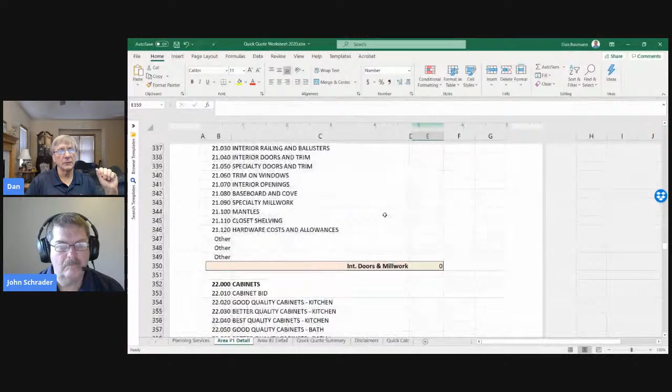And then you're going to have a window package. So the window package, you've done enough of these, it's going to be $8,000. You just work your way through this process of all these different categories and the elements in the categories, and you finally get to the bottom, and you're going to come up with a high-low number. Notice I said high-low, not low-high.

Let me get to the bottom here. Actually, I got to go to the summary. So I have it worked out right here. Here's where I plugged in those numbers, so I had these different categories. This is what I used to use when I did contracting, and we've got a high and a low number. I would just adjust that high-low number right here and put a little number there, and this worked pretty well for me.

I would show this to the client and say, yeah, your job's going to be 18,000 to 16,200, or 180,000 to 160,000, whatever the numbers end up being, because I've only plugged in a couple numbers here. So the idea was that I would do medium, low, high. That's right, when I would only do two categories, I would go high, low.

The idea is that the customer will remember the first number you tell them. So if you tell them it's 16,000 versus 19,800, guess what's going to happen the next time you have a conversation with them? They're going to say, yeah, you remember you told me it was 16,000 - versus if you say 19,800, it's really silly too, and it works.

Have you ever done this, John? Where you've given them the high price first? Yeah. Not since I've learned about this. I haven't really tried that. No. Okay, try it sometime.

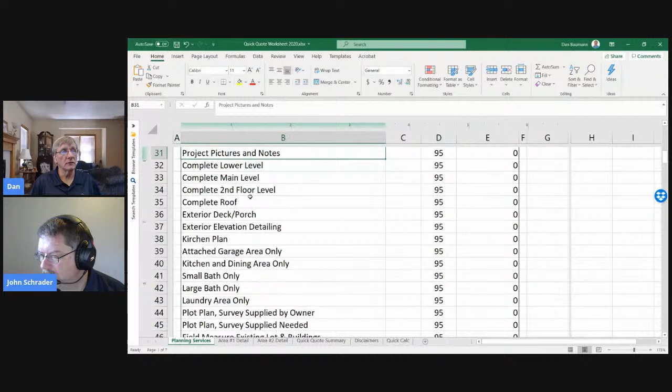So when you think about the time you spend doing an as-built, that's kind of like discovery. And when you do a new home, you've got to discover what's the lot, what's the setbacks, which way you're going to face it. There's a lot of work that goes into deciding where that building's going to go on that lot. When you get into an as-built, someone's going to have to go measure the lower level, second level roof. So I just kind of threw all these different things on here, you're going to do the landscaping. You're going to add for high detail, electrical, HVAC, mechanical.

I think Al Fry was just on a call on a webinar with Scott, where he talked about he charges more for that. What just happened to my screen here?

Changed. Color. There we go.

You can break that down as to how much detail you're going to put in your as-built—it's going to be a quick walkthrough measure, or you're going to put real detailed time into it. I know contractors that will do a quick as-built, get some rough numbers, do a good plan, but they know it's not perfect yet. They get their estimates done, get the proposal done, get the project sold, knowing they're pretty close, but they don't go into construction until they go back and remeasure the job and redo the plan, or at least fix the plan they've got. They verify everything.

So there's lots of different ways to do it. I've always been of the mindset: you go out and get accurate dimensions right away, be done with it, then everything you do from that point forward is solid. Someone's got to pay for that as-built.

Then we roll into the conceptual plan and ideas—you've got to come up with the ideas. John, how many times have you done a plan where you've done 10 different versions of the same plan, showing a little different variations? Most of the time when I do that many versions, it's because I'm not charging the client enough to start with. You know what I mean? What do you mean? No.

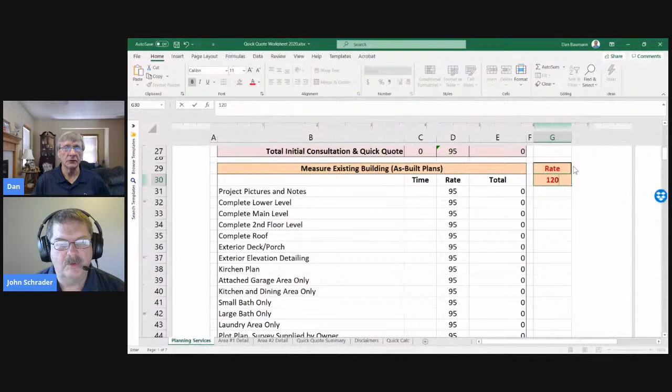To answer Jay's question from my perspective, I noticed you had a lower per hour rate for conceptual up at the top. Yeah, that should probably be higher actually. Think about it. Part of my thinking would be you're doing conceptual stuff, you might just be shooting the breeze a little, getting to know them. Maybe you don't want to charge them the full 120 for that.

I know sometimes when I'm doing a plan, especially if I'm online with them and I'm struggling to get the Chief software to do something - I know how to do it, but I got to go back and remind myself - I'm not going to charge them the full rate for that hour. Exactly, you'll end up being fair.

Everybody I think is going to do that to some degree, where they end up being fair with the client. So if you set that at $80 instead of 120, or 95 instead of 120, you can just take the time across the board and not have to worry about it. I don't know why I had it set up with different numbers at the time. It seemed like a good idea, so I just left it that way.

So as you roll down here, you've got the final, preliminary, which is more detail, final plans. That's where you do all your detailing, structural stuff, all of that. Then you've got your project estimate proposal - someone's got to do that. I don't do any of that kind of stuff, mostly the contractors do that.

You've got interior design specialist. I'm an okay space planner, but I don't do interior design. You don't want me to recommend colors - I can guarantee that.

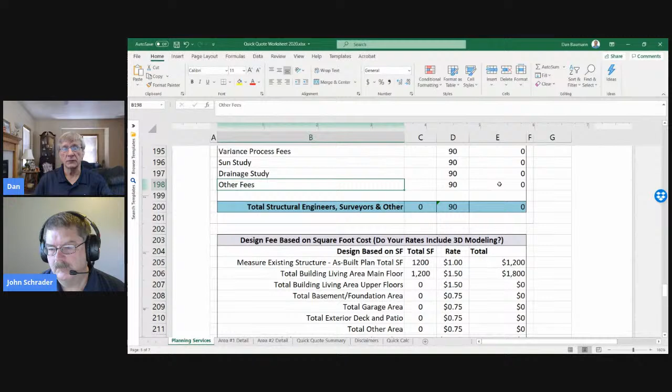So that's going to bring you to a number you can look at and say, well, it's going to take me 100 hours to do this job - that's $12,000 in my case. And then I can say, let's take a look at it based on a square foot cost. So how many square feet you got?

What's the range on square foot cost for doing plans? I've heard people do plans for 50 cents a square foot, all the way up to $7, $8 a square foot. Depends on the services you offer. So that can range quite a bit. If you have a 1,200 square foot project at $3.50 a square foot, that's going to be a whole different price - but what are you offering for that?

So you want to keep that in mind too. I get asked all the time, what's the typical square foot cost for plans? And it depends - what's a typical square foot cost for a car? What's a typical set of plans? It's just like, what's in that set of plans and how much information do you need? What kind of project is it, et cetera. So it can vary quite a bit.

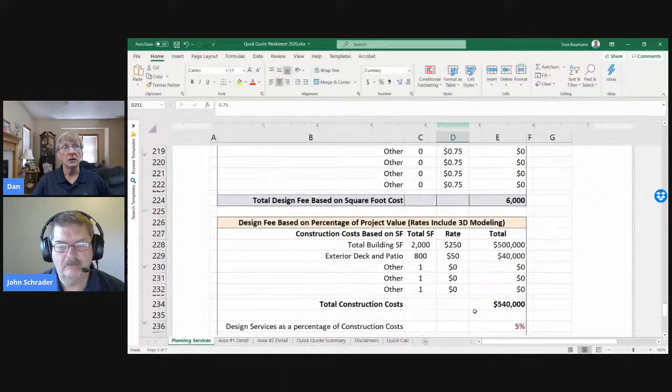And then design, you hear this percentage of project quite a bit - what's the percentage of the job? So if you're charging 5% on a 2,000 square foot job, on a $500,000 house, what's that fee going to be? So that can all change, that can all vary.

And of course you're going to have some sort of a payment schedule too. So this is this kind of a sheet - I wanted to throw this out here, get you guys thinking about this kind of stuff again, and that got me thinking about this kind of stuff. All right, how to get paid more for your design services. To me, this is kind of one of the big ones right here: recognize and believe in the value that you bring to the marketplace.

A lot of you guys are out there doing this stuff every day. Like me, I've been doing this for years. John, you've been doing this for years.

And I know that you sometimes forget that you know a lot of stuff. If the clients don't know what size headers go where, or the codes on windows, the codes on joists, all of this stuff we've learned over the years, some through trial and error, some by making mistakes, some by going to school and learning it. But we put a lot of time into learning all this stuff. So recognize that. I can't emphasize this enough, you guys.

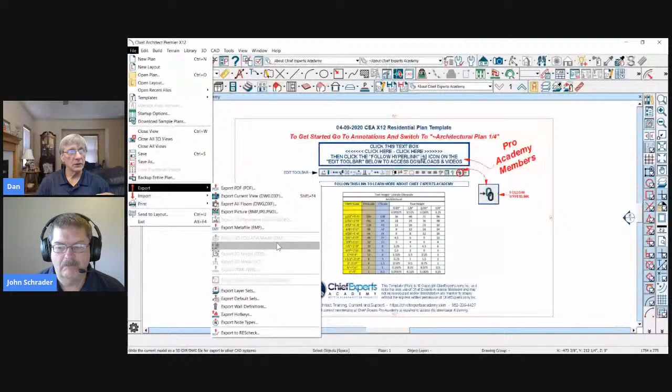Use the Chief 3D model function. So when you're in Chief, you can go to export, and you can export a 3D model or a panorama. Those are really cool tools that help your clients understand what they're doing. And I'd love to hear what you guys have to say about this.

Here's a good one: licenses, credentials, testimonials. Yeah, I had a presentation book, and I would hand my client about 20 testimonials and phone numbers of people that they could call and check me out if they wanted to for different kinds of projects. So that was always kind of fun.

And see what else we got—these different rates for secretarial, drafting, design work. Yep, Bill, there we go, talking about the different pricing that you do.

So feel free to chime in here—what kind of things do you do to hug your clients better? I really recommend that book, get the audiobook and listen to it while you're going from job to job or something like that. The context of that book, How to Hug Your Customers, has nothing to do with construction, but the concepts this guy talks about, and what he did in his business to become one of the largest clothing retailers in the USA and probably in the world—and they still do it today—it's fascinating. It just really gets you thinking about what you can do to hug your clients a little bit better. So I highly recommend it.

Jeffrey has a good point there, and then we probably should get on to these Chief questions—we're going to run out of time fast. He says it's very important to learn to say no, not a good fit. I carry a short list of small contractors that might be able to help when a client's budget is too small, and he gets referrals from that too. Yeah, that's a good idea—networking is really important. Or if it's a client you don't want to work with, and you think they're going to be a difficult client, then get your list of people you don't like very much and recommend them.

I just wanted to bring that up because it was on top of mind right now because I'm listening to that book about how to hug your customer. It's good stuff. One of the things I would do on all my projects was keep a clean job site. Clients love that, and I loved it too because it made it easier and safer to work on the job. So keep that in mind.

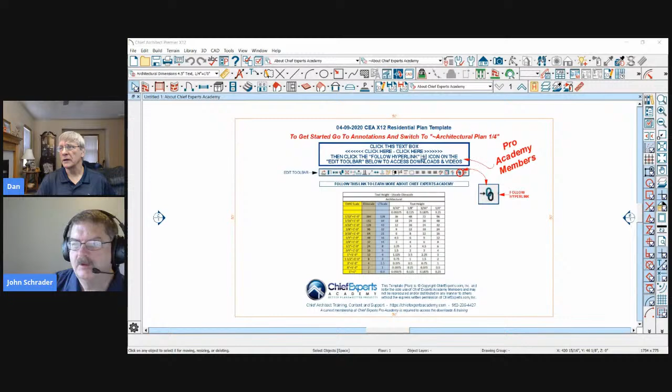Project information not being retained when using the layout sheet as a template. Now, the project information, it's the designer info and the client info. That's not sticking, right? So there's one thing you need to be aware of when you create a template.

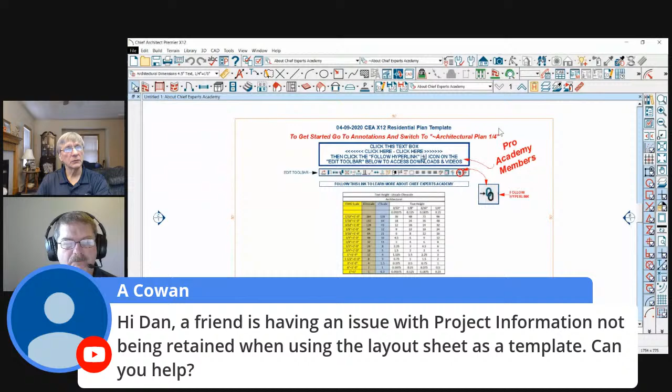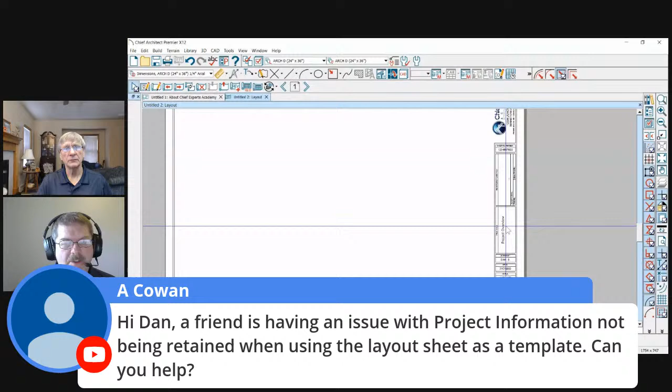What you could do, under tools, here, let me go open up a layout sheet. When you go up to tools, let me switch to page size. So we got some information here - we got new home plans for. So there's a place for client information, and we can see the whole page. There's a place for your company information and a place for client information.

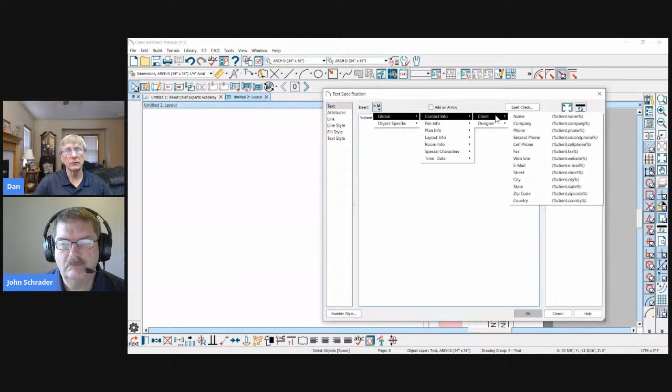Now, on page 0, you want to put these fields. I've got a field here, and you see where it says client name in between percentage signs - that's a macro. Macros are created here, and on the layout page we can put... actually, we want to go to contact info. So we have client info and designer info. Client info: name, company, phone, all these different fields. Those are the fields you want to use, and they're all predefined macros.

And the way you fill those in is you go to tools, project information, and designer information or client information. I'm going to put client information in here, and here's where you put customer name. I can't spell, maybe I try to go too fast - it just doesn't work. You could put a phone number here, email, street, city and state.

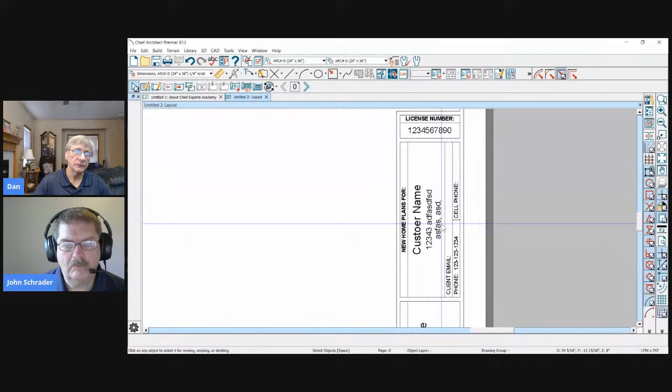And that'll show up here automatically. So I have it set up in my template so that when I do that, it doesn't matter which size page I use - that information is always going to be there for all the size pages I'm in. So if I switch pages midway through doing something, or even at the beginning, I don't have to re-enter the customer information.

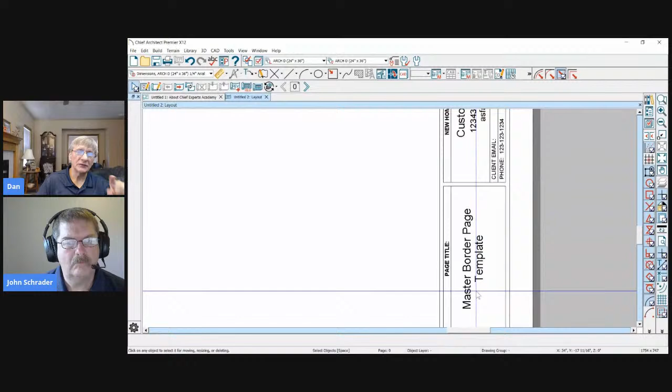Now, April was saying project information - okay, this is customer information, project information is different. That is what she was talking about. Project information: the client info and the designer info isn't sticking when they open up a new layout.

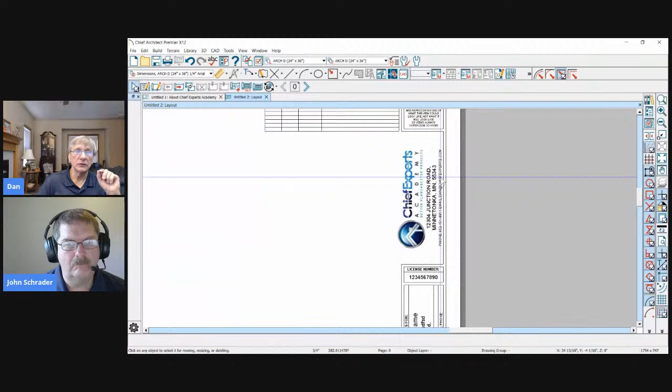All right, so the client info should... the client info won't, because once you open up a layout from a template, it's reading from whatever you put here. Now, what I'd recommend you do, and I'm going to change this in my template, is just hard code your templates with your company name on them, unless you remember to do this.

And this is why I'm changing my mind on using this function here. I mean, you'd have to fill in your designer information every time you open a layout page, unless you do this. And that's a preference setting. So you go to preferences and you go to text, and you define under preferences and text the default designer information.

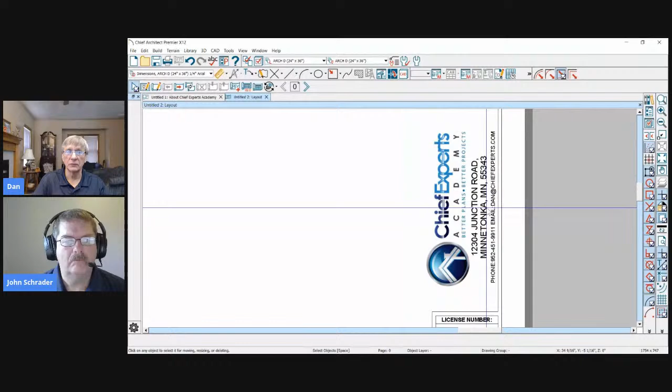This is a preference setting that affects the computer you're working on. So if you take this and put it on this computer and then open it on a different computer, the information probably won't be there. So this is a preference setting you can set on your computer. Here's all that information, and that'll open up every time you open your template - that information will be there on that computer. Now if you go open this on a different computer where the preferences aren't set, this will be blank, much like this was blank before.

Isn't there a way, Dan, when you save that as a template, to ask it to keep that information? Not if you're using this. This has to do with project, designer, and client information, and it has to do with just this file. This information won't be stored in a template.

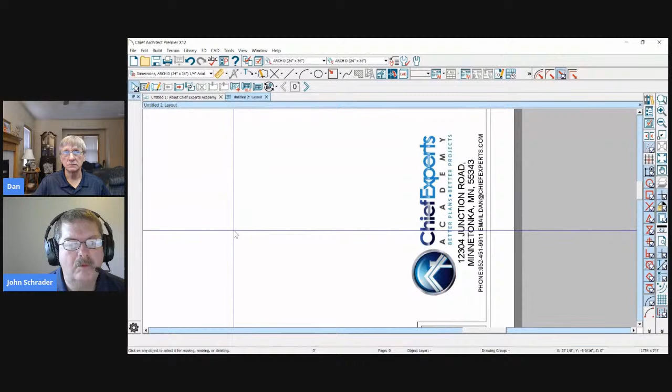But can you just go through the steps one time so you can clarify for me what I've been seeing? All right, so when it comes to your company information, go to page zero. What I recommend is you just hard code it, type it in on the page, and don't use the macro. I'm still using it here, but I'm not going to use it anymore. I use it here because I'm all set up and ready to go.

But if you use my template, that information will be blank when you get it, because the preferences on your computer aren't going to be set up. I know I'm kind of not explaining this well, this is a real tricky thing to discuss.

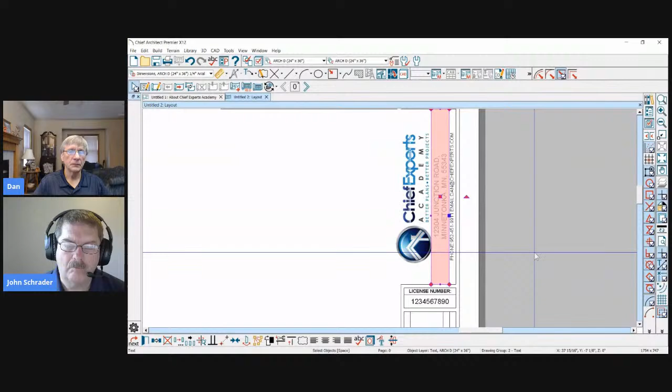So if I go delete this, and I go delete this, and I change this, I'm changing my default information, and it didn't change it on this particular one. But if I open a new one and switch to my page size, now it's picking up what I just put in my preferences.

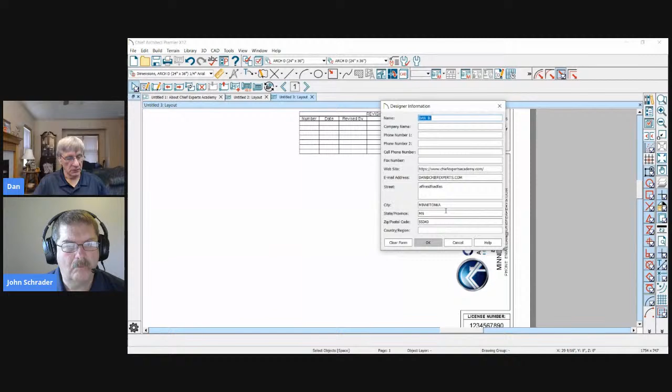So if you took a template and did that same thing, put the information under project information, designer information, here, this only sticks for the current plan that you have open. It doesn't stick if you make a copy of this and put it on a different computer. At least I have not gotten it to do that.

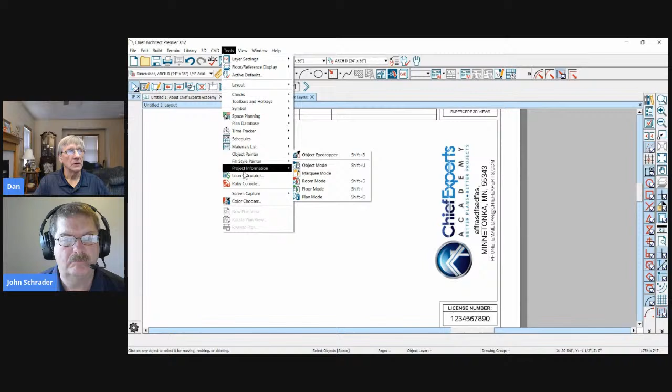Do some changes in there and then go and save that as a template. Let's go to tools, project information. So it got to a point where it just became easier to just hard code it onto the plan itself, onto the template itself.

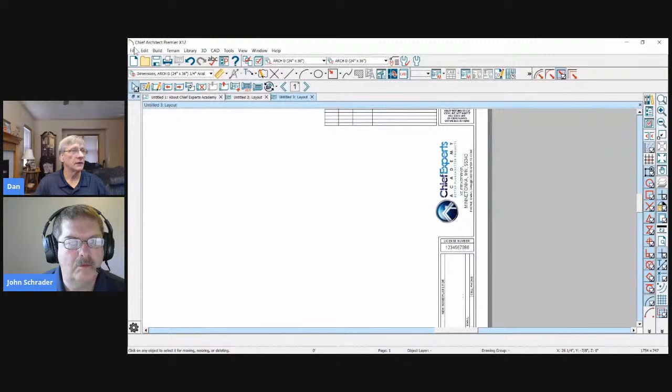So I've changed my address a little bit there, and I'll save it as a template. So now if I go save it as a template, I could go File, Save as a Template, go to templates, save as a template, and again I'm going to uncheck everything here.

But you got client info there that you could keep. Well, unchecking it's going to keep it. You want to keep it, so you want to uncheck it. I guess you don't have any company info. No. Okay, but client info you do.

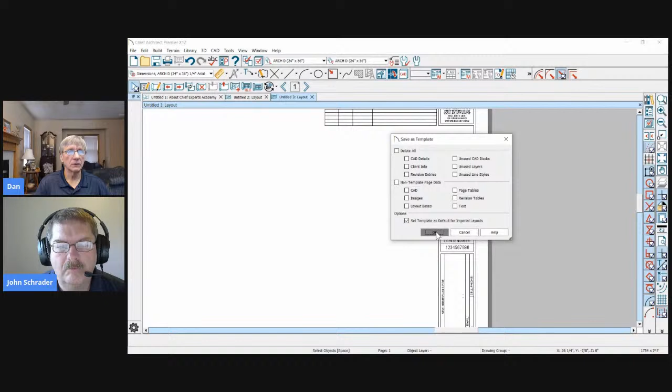So if I set this template as a default for Imperial Layouts, which is fine, I'll go ahead and do that, click OK, and I'll rename it, I'll call it my test template. I do that ninety percent of the time, a before the L. Okay, so there we go.

So now if I close that, let's close out the layouts, and let me open another layout. So if I go File, New Layout, okay, so it held that information.

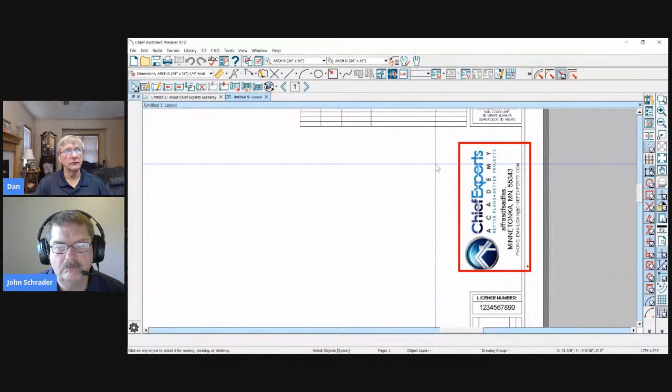Just hard code it on page 0. Go to page 0, type in your address and stuff like that, put your logo there, and be done with it. I've found that to be the easiest. Then you don't have to think about it anymore.

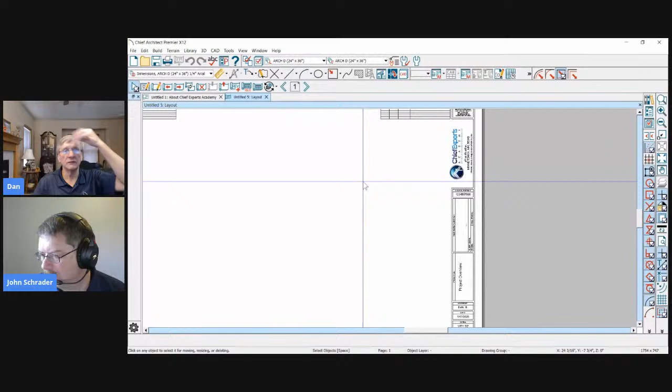I do use the blank fields for client information, and the project info too. I'll fill this form in, and that information saves with the layout. If you open this on a different computer, I believe it's still going to be there, so that shouldn't be an issue.

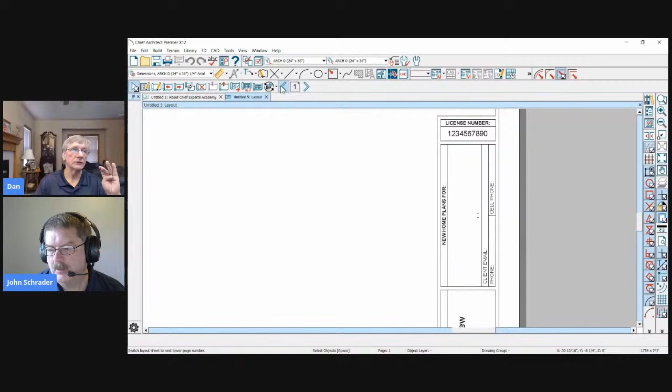Yeah, give it a shot. Again, worst case, just set up a box here and put your client information there, and call it done. Just try to reuse the same boxes each time. I was just trying to make use of Chief's macro. Everything else should work fine and saves with the project just fine. All the page titles and all that kind of stuff works great.

That was kind of a long-winded answer, but it's really confusing on how they did that. Your answers need to be shorter, we're counting down on the time here. I know, what do we got? Bill had a question, what does Bill have?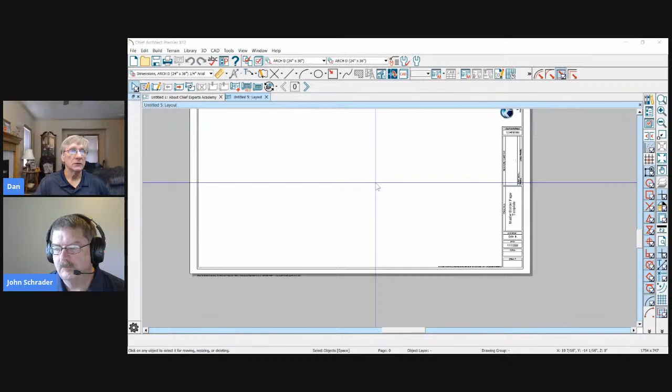A note schedule is when we go into our plan and put in a note. In my template, I have a note already set up. If I go into the text tool and choose note, this is how we create a note schedule, and I start adding notes to the page. Here's note number 1 — I'll just do gobbledygook because it shows up quickly.

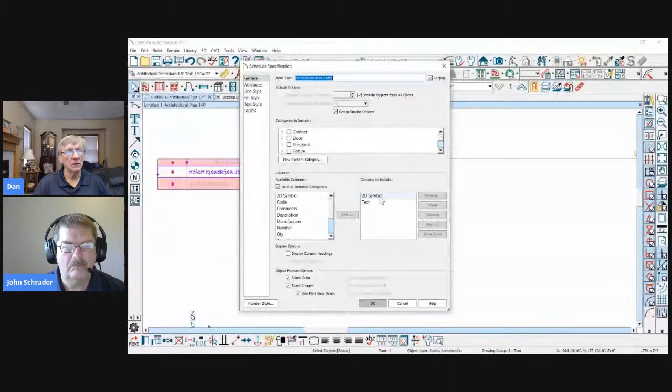Keep in mind there are settings for these things, and I've got to remember where that is. That defines which floor we're going to have on our schedule — I think it's part of the schedule. So when you go to the schedule, the way you create a note schedule is by going to schedules and grabbing a note schedule right here, then you bring that onto the plan.

Let's go do that — click a new one, go to the schedules, get a note schedule, click here. You need to open the schedule and define which categories it's going to include, then say which floors the objects are going to include. We can uncheck this and specify floor number 1, floor number 2, all the objects, or specify which floor and check that — and include objects from all floors.

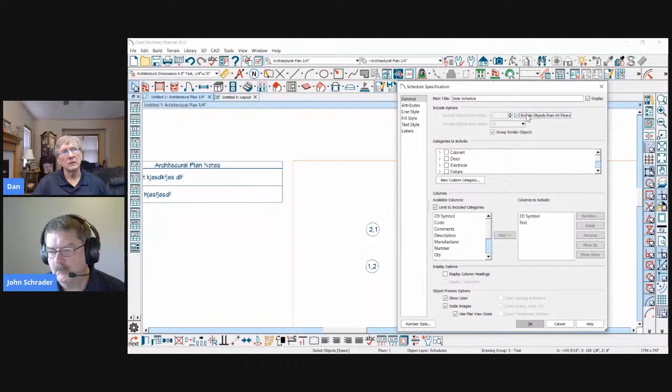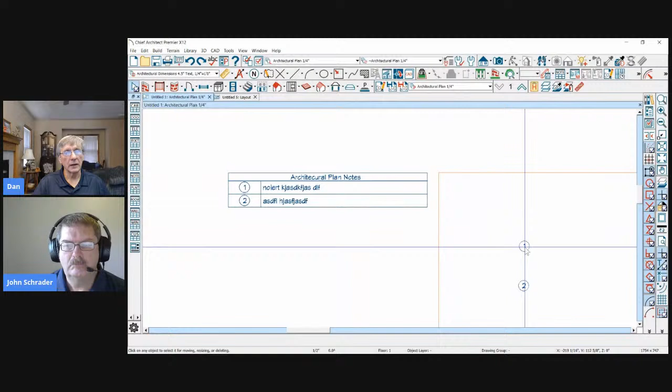If you check this in, it'll do the whole plan for whatever you specified — it'll do all the floors together, but I don't think it'll specify which floor it's on, so you'll have to do that yourself. When I look at the note, I don't have any option to specify this is on floor 1, floor 2, floor 3. I suppose you could put that as part of the note if you wanted — this is on floor 1, floor 2, or just keep it going.

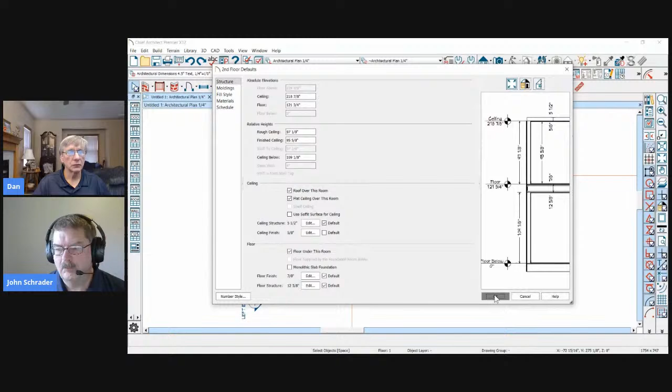Now if I create another floor, build a new floor, and put some more notes on the second floor, then click OK, I should have down here another note number on the next floor. But again, it's not going to tell me which floor it's on — I'll have to do that manually.

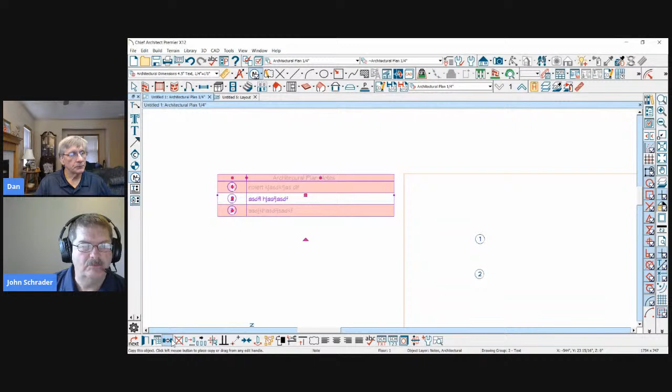He's asking to be able to put that same note schedule on all 3 floors, or on the layout. Oh, on the layout, okay. Well, there's a couple different ways. I don't know if we make copies of it — I think it screws up the numbering. Now it's 1, 2, and that's not telling us which floor it's on or anything, it's just doing that.

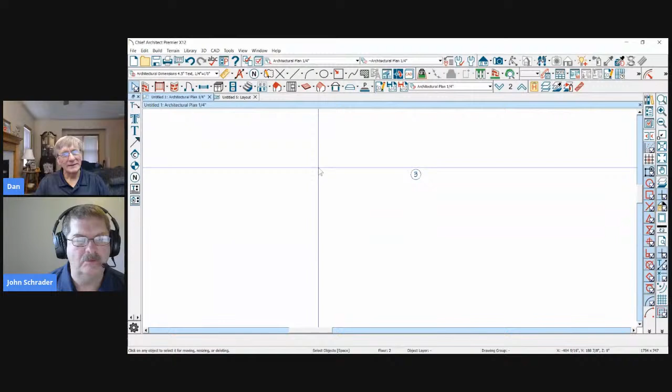So the way I do it is have a separate viewport for the schedule, and I can put it on the layout wherever I want it. That's exactly what I was going to suggest. So when you send this to a layout, let's go ahead and save this plan, we'll call it notes, and we'll open a layout.

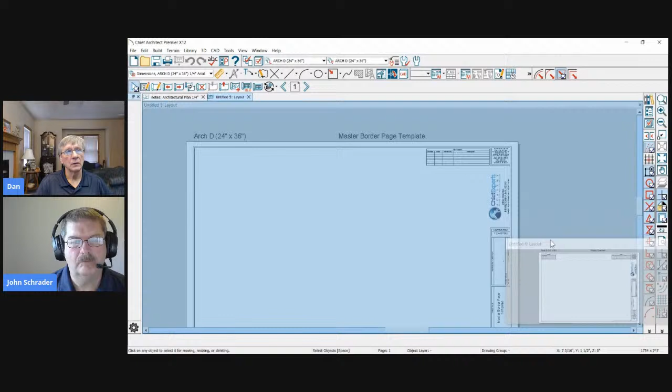So when you send your floor plan to the layout, I'm going to send this to the layout. Click OK. And so there's that floor plan and the note schedule. So just make a copy of your floor plan, pull that off to the side and crop over everything except the schedule.

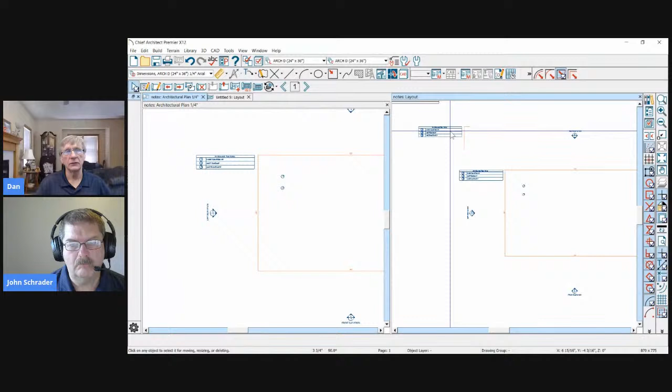You could even put the schedule in a CAD detail window if you wanted to. Schedules in the CAD detail windows do stay updated. So now you could just copy and paste that onto every page of your layout that you want it on, and you'll be good to go.

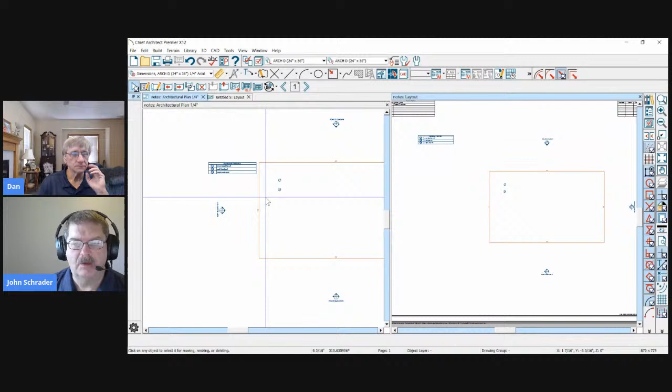Just do a hold, paste, hold position, and put it on the next page. So you really have one schedule that will show up for all the floors. I do that for most of my schedules anyway, because that way I can put it on the page wherever I want. You can move it around, put it wherever you want. And I keep a lot of my schedules in a CAD detail window.

Why don't you show us how that works real quick? So if you do that, just go to your floor plan and go to CAD detail window right here. That just creates a blank screen that you can put things in. So I'll create a new screen and I'll call it, maybe I'll just call it my schedules.

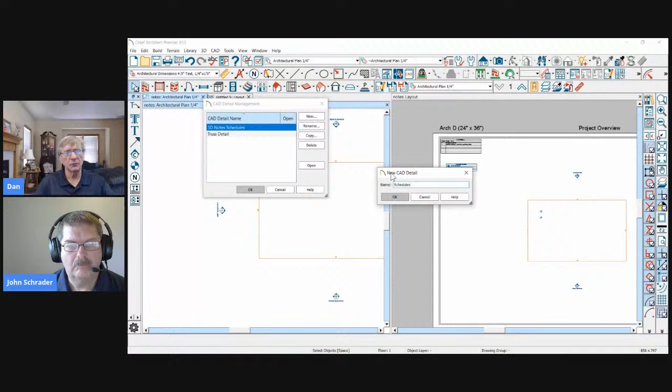You could also just put your schedules off to the side on your floor plan. I've done that too, that's usually what I've been doing. But now I could put my schedule in that. So I could just copy that or create it here. And there it is, so I got to make sure I turn that layer on.

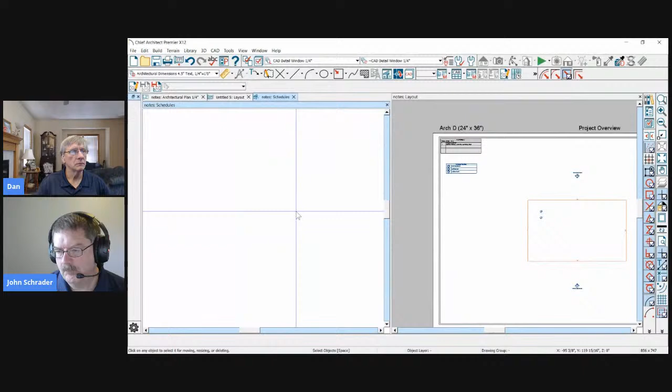Schedules, so it is. Let's go create one. Maybe that doesn't work for the note schedule. I don't think I've done that for the note schedule. Okay, well maybe we can cover that another time. Yeah, we got a... oh, here it is.

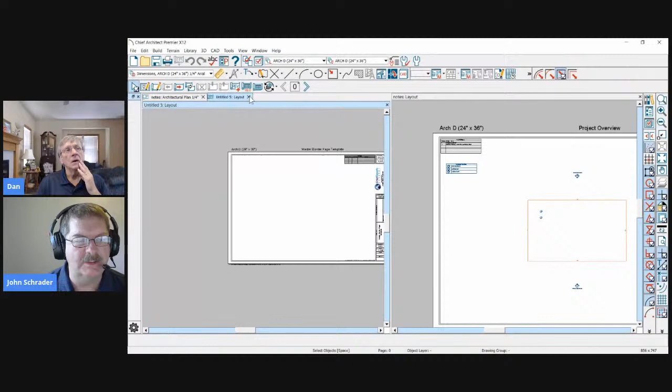Putting fixtures on a foundation. What kind of fixtures? Where they have to put plumbing through the concrete, like a toilet and a sink and that kind of thing. To show the plumbing layout? Yeah, so the plumbers can see where they need to put their vent stacks coming out of the concrete, and the toilet, where the toilet's going to be in the concrete. I believe that's what it was.

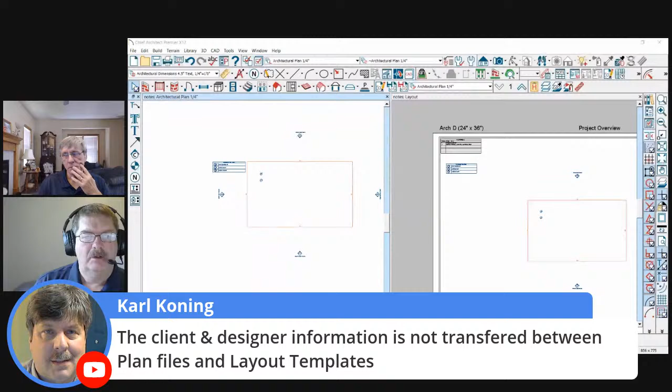I didn't write down who asked the question. So I know when I do plumbing layouts on concrete, it's a whole separate plan view. Right. So that's...

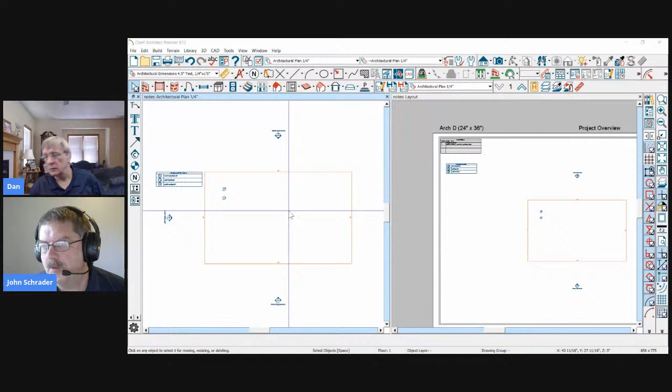Let's just do something real quick here. Let me just... Do you show plumbing fixtures on your foundation plans? And if so, what is the best way to show them in Chief?

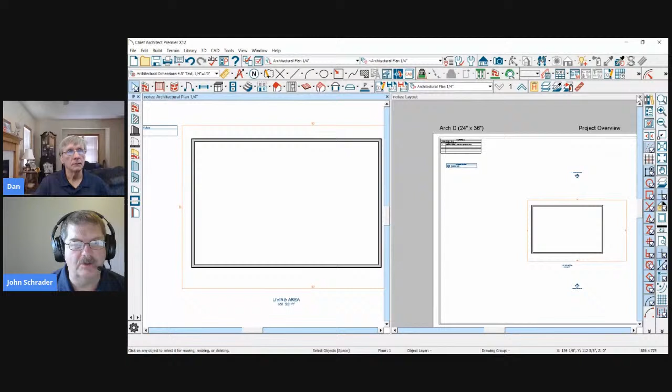The way I've been doing it is using the floor reference. I made my own floor reference file or layer set, and I changed the colors to all light gray. I'm just putting that floor reference on that foundation. And you can dimension to some of the things, some of the things you might have to put lines on there to dimension to. But that seems to be working pretty well. That way, if something changes, like if I change the placement of a toilet or something, it's going to change, rather than using a CAD detail or something like that.

I can kind of take that question a whole bunch of different ways. What you're talking about doing with the floor reference tool right here, and setting up a separate floor reference layer set with the right colors, can work just fine, and the right amount of things on it. So you turn on and off the things that you want in that reference.

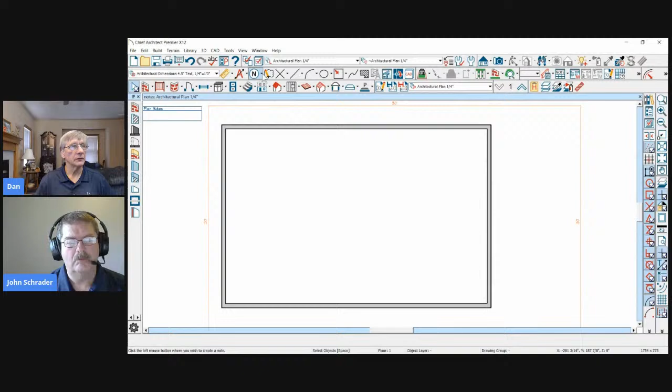I do that a lot of times, I will have a separate layer set. So let's go create a foundation real quick, and I'll just show you this as quickly as I can. So let's go build a new foundation. And to clarify, when I'm doing that, I'm doing a mono slab and using the foundation to create that mono slab.

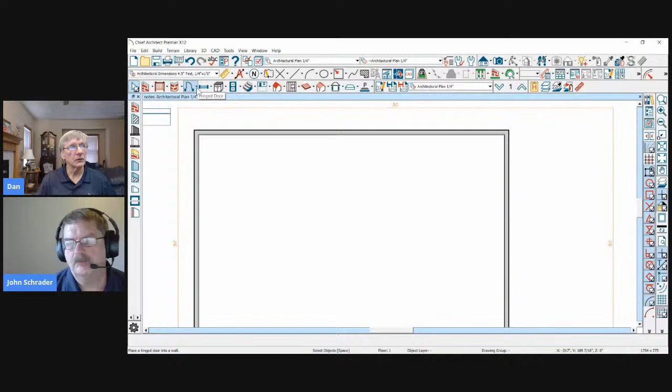Yeah. My toilet on my first floor doesn't show up on the... Yep, so understood. So if I go up, let's do that, let's just show that concept. So if we go up here on the first floor and we place a fixture, in this case, get a toilet.

Good, all right. So there's my good old Kohler Wellworth. Okay, so there's my toilet.

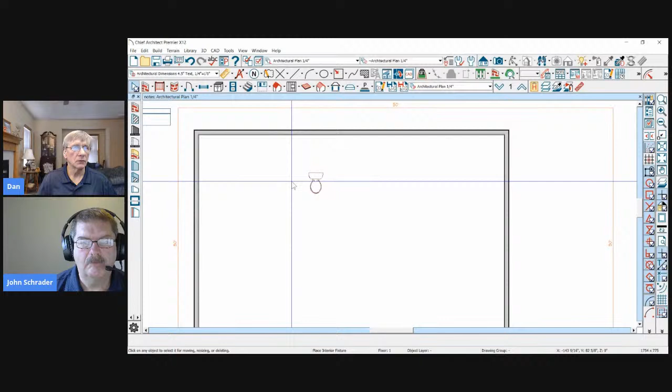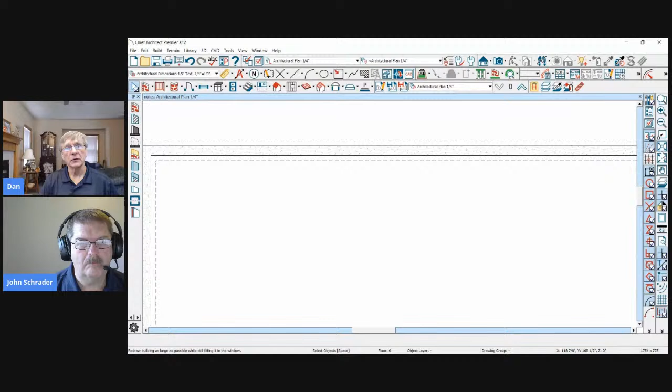And on my foundation plan, I must have plumbing turned off. I want to show where the plumbing should be on that, because it's going to be a slab on grade, or slab with footings, or it's the foundation plan that you need to lay out the plumbing. So if I go down a floor and turn on my floor reference, you see it shows up there. And what Dan was talking about was creating a separate floor reference that you could refer to.

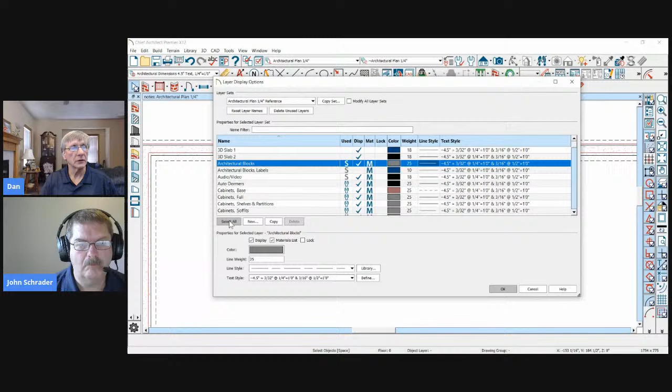So what you would do is go make a copy of the layer set. It could be any layer set, actually. So I could copy this set if I wanted to and say, this is my architectural plan, 1/4 inch reference. Okay, and I could then change all the colors on this reference. I could select all and change all the colors to whatever color you want. I'll just go bright red for the sake of this demonstration. So you see all the colors are now changed for the new layer set. Remember, layer sets are just groups of items turned on and off.

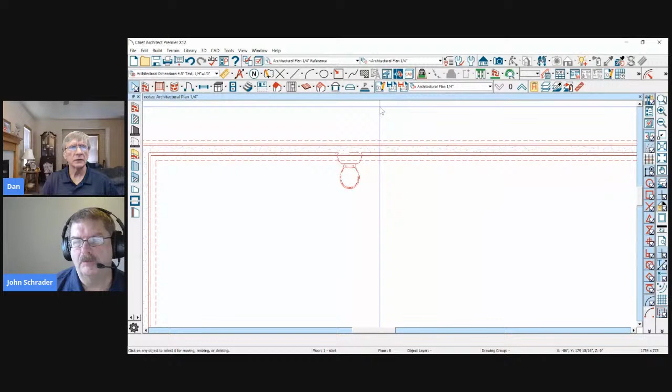And then let's see, I would want to create a new plan view. How do we do this again, John? So we're going to make a copy of the plan view, right? Yep. And we're going to call it architectural plan, and I'll call it my floor ref. All right, click OK. And then I think you're going to have to get in your project browser and open that.

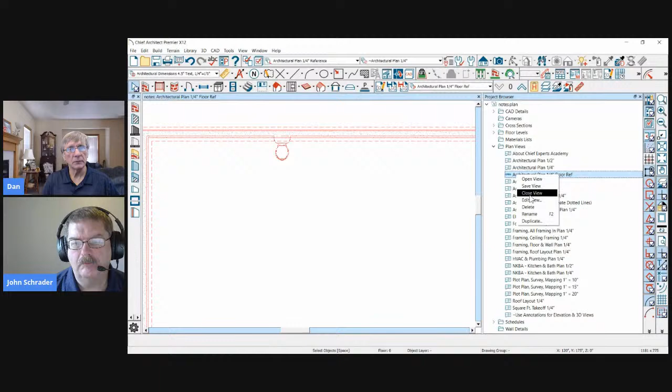Oh, that's right, yep, I haven't done this for a while. So then we go to our plan views, and we go to our floor reference, and we edit this view, and we're going to select our reference display, which is going to change to the one we just created. So now I'm using that reference, and that plan view set is bringing up that reference.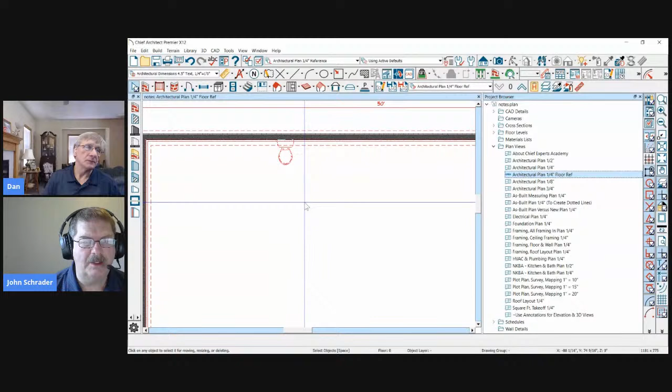Yep. And I turn that to light gray and maybe even make it all dashed lines. I turn on just the bare minimum of the walls I need. So it's usually just the toilets, sinks, and walls that I would include in that floor reference. So you're turning on just the layers that you need for that reference. So basically what you're doing is you're kind of overlaying the first floor on your foundation plan. Or you could overlay your first floor on the first floor.

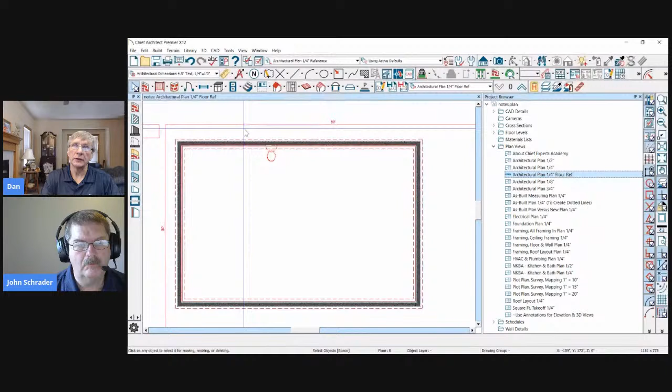No, you can't. Can you reference the same? We can't reference a plan on the same floor, can we? I don't know why you could. Oh yeah, there I am. So I'm referencing that same plan.

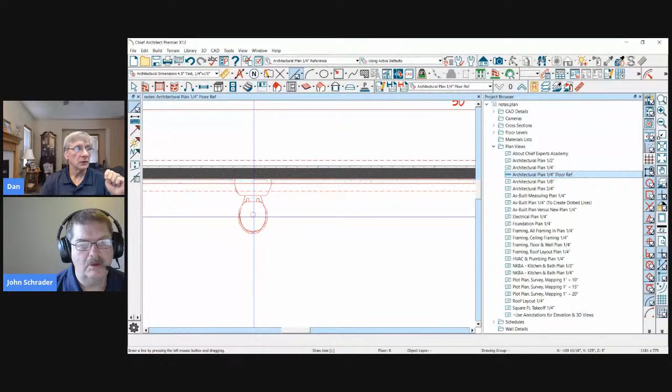Anyway, now you could go ahead and dimension a lot of these things. So you should still be able to snap to these items. So there's a center there. So then you could dimension.

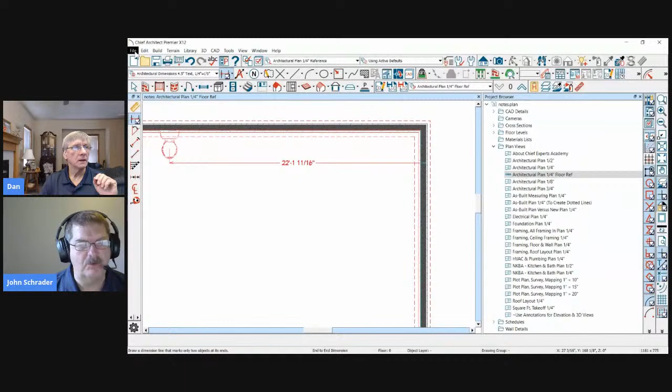Some of the things you can, but I just had a thought. If you dimension that on your actual floor reference layer set, and have the dimensions on a different layer so that they just show up on your reference, that's how I tend to do it. Then it would be done. You wouldn't be dimensioning it on your foundation plan, you'd be dimensioning it on your first floor reference plan. Yeah, yep, that's how I generally do it.

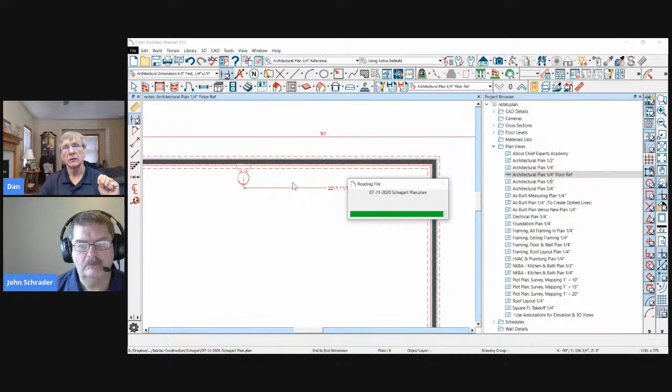So let me see if I can get to this really quickly here. I know we're running out of time. This is a large project that had a lot of plumbing that needed to be laid out. And to do that, I created a layer set. See if I can find it quickly. Let's see, did I do a plan view or did I do a layer set? I don't remember.

Plumbing dimensions, 1/4 inch view. So I've done so many changes on my layer sets here with this. Yeah, so here we go. So all I did was create a new plan view, calling up a different layer set that just has plumbing dimensions turned on. Okay, so I created a plan view.

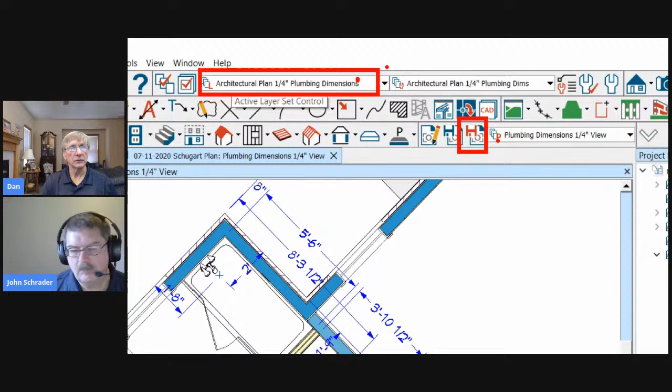And I have that, and then I had to create a new set of dimensions in my default sets. And so when I switch between the different views, here's my plumbing layout, and here's my typical layout. So I'm just basically turning on and off a different set of layers and a different dimension default set.

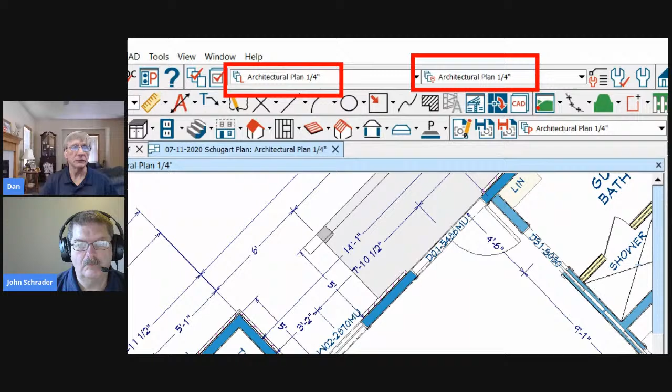Yep, so that works well too. All right, got time for one more quick question. There was a question about layers with the layer manager.

When I click something like dimensions, the active display does not only show the dimensions, the active view. I still have to go and scroll to find them. I think they're getting a whole list of all their layers in their layer management instead of just the things pertinent to what they're looking at.

So here's the previous question again: when I click on something in Chief Architect, it no longer shows only that in the active displays. That's the same question you just had up. When I click something like dimensions, the active display does not only show the dimensions.

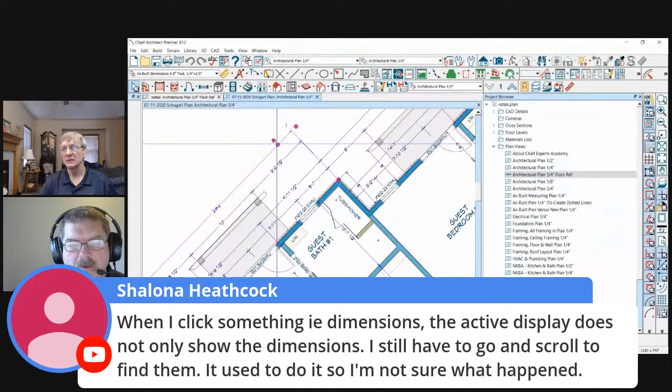So go to your active display manager, your layer manager, that would be up on the right side. This one, yeah, so it's not isolating that. Oh, I'm sorry, okay, you need to go to your layer manager on the side here. So you want to just see dimensions, you don't want to see the whole list.

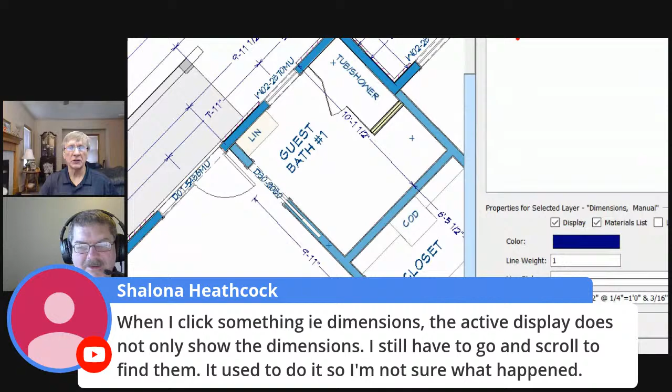Okay, so pay attention to the gear icon down here. This little gear icon allows you to adjust how this looks over here on your sidebar. So if you want to see just the item that you're clicking on in the layer manager, make sure that you don't have show all layers turned on. Make sure that is unchecked. With that unchecked, then whatever you click on...

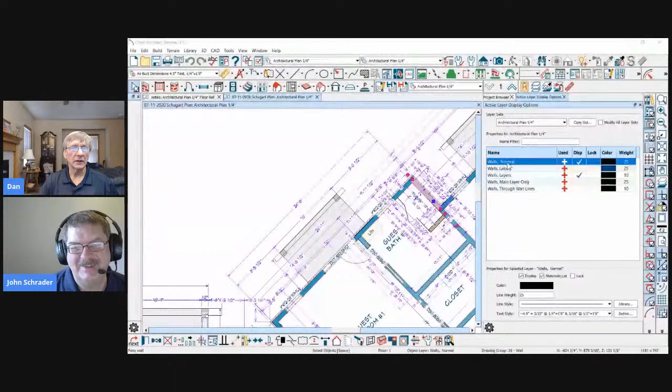Can you take down the question? We can't see where you're at. Oh, sorry, I got it. There you go. So again, I've activated the layers set on the side window by clicking on that icon. That brings it up in the side window.

And then down here, we want to turn on so whenever I click on something, it just brings up the layers for that item. It doesn't bring up all of the layers. So you have to go to the gear icon down here. Make sure this is not checked. Do not turn on show all layers.

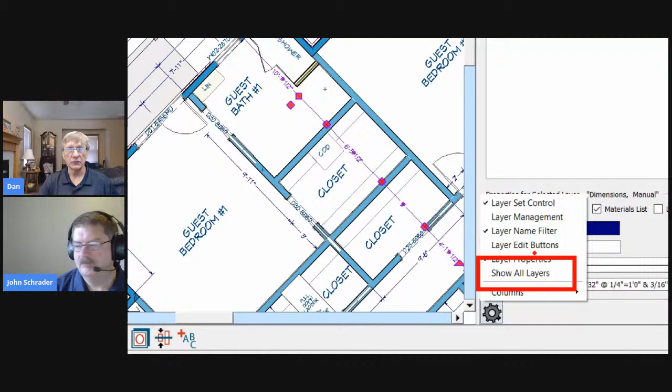Okay, you can look at all these other ones and turn them on, so you can make the layer display here look just like it does when you click up here and open it. So you can have everything the same, but you only want to see the items that you're clicking on. So I hope that answers that question. I think we got it. I think you did. All right, awesome.